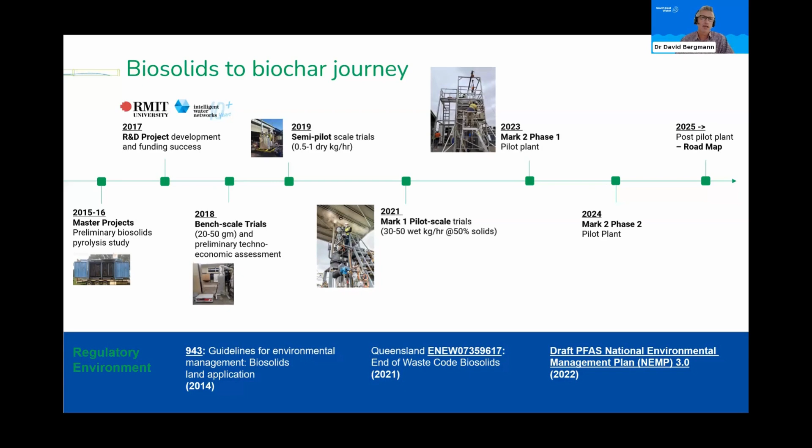I'm going to pass over now to Professor Kalpit Shah, who's going to explain more about how the pyrolysis technology works, the particular benefits of the technology, and why we're pursuing this direction. Thank you so much, Kalpit. Thank you, David, and thanks, Aravind, for the nice introduction.

Now, I'll take you through how PYROCO works. So first, what is PYROCO? PYROCO is a fluidized bed heat exchanger device. What we have done is convert a conventional fluidized bed system into a fluidized bed heat exchanger type device, which offers significant benefits. I'll talk about the benefits later, but let's see how PYROCO works.

In PYROCO, pyrolysis occurs in a pyrolysis zone, which is the innermost zone of the PYROCO system, as shown here. So imagine you have a reactor with a distributor plate at the bottom, and a fluidizing gas constantly coming from the bottom, and your solid waste like biosolids you're constantly feeding from the top. Now, with the help of the fluidizing gas, your biosolids will be constantly fluidizing at a given temperature. But this fluidizing gas will be oxygen-free.

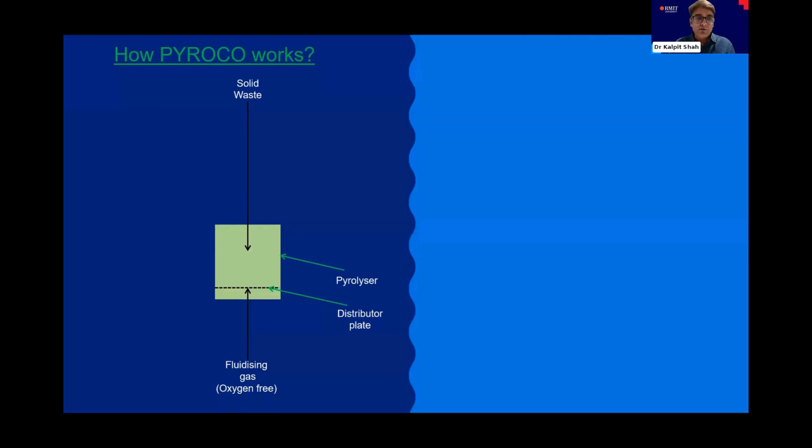That's why you're creating a pyrolysis type environment. Now, when pyrolysis occurs, your biosolids produce mainly oil and gas vapors as well as biochar. Biochar will stay in the bed within the reactor. However, oil and gas vapors will travel upwards, and then we have created at the top a screen type disengagement zone through which we're taking the oil and gas vapors out

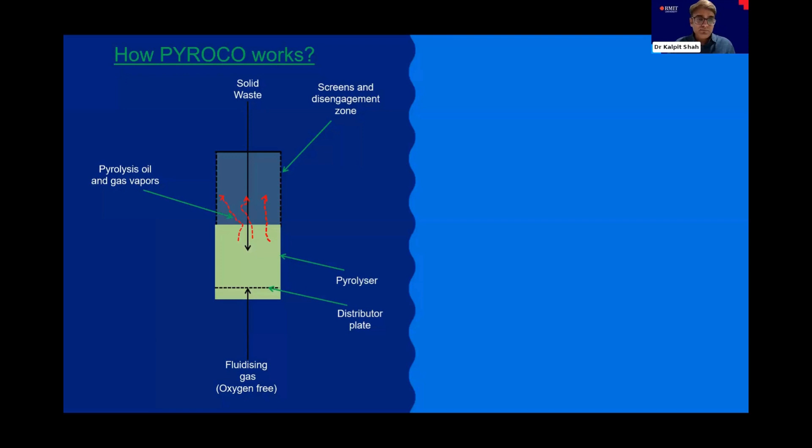into an adjacent combustion chamber, where with the tangential air inlet, we're trying to combust some of the oil and gas vapors in the adjacent combustion zone. Now, when partial oxidation of these oil and gas vapors occurs, they generate energy, and this energy will be provided via indirect mode to the pyrolyzer, because pyrolysis of biosolids is an endothermic reaction.

Now, imagine if you don't have sufficient surface area available just outside the pyrolyzer reactor through just the peripheral surface area, then we're creating additional surface area by putting some of the tubes inside the PYROCO reactor and allowing the combustion gases to travel upward all the way out of the reactor. And this flue gas could then go to the thermal oxidizer followed by the dryer.

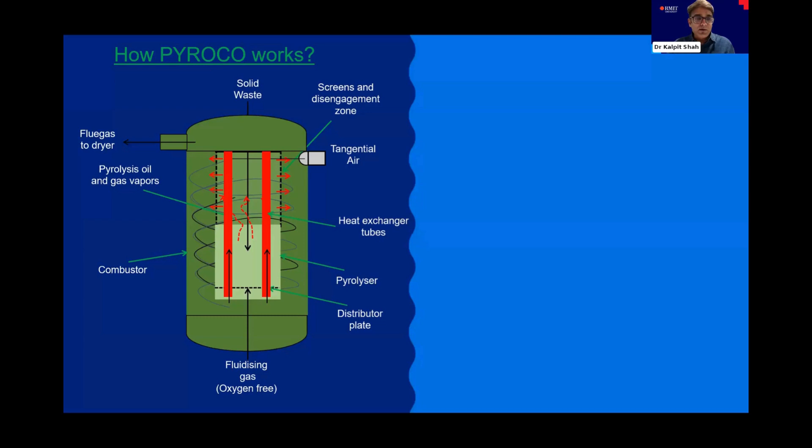Now, biochar will be constantly taken out from the pyrolyzer via an overflow or underflow discharge screw. So imagine you have constant biosolids you're feeding, constant pyrolysis is occurring, and also you have a constant discharge of biochar, and oil and gas vapors which are consistently produced, taken out into a combustor and partially oxidized, and they're traveling through tubes all the way up and out of the reactor. So these combustion gases are providing energy for the pyrolysis reaction.

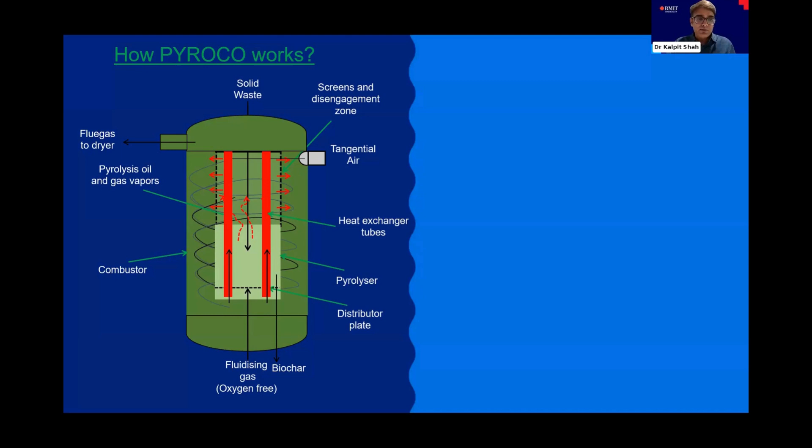Now, let's see what benefit PYROCO offers. The first thing we've done is we have overcome the heat transfer surface area limitations in any other conventional or emerging reactor designs by converting the fluidized bed into a fluidized bed heat exchanger type device. So for any other reactor, the surface area you will have available is just the peripheral surface area of the reactor itself, where pyrolysis would occur.

Now, in PYROCO, along with that peripheral surface area, you could add more surface area by adding a number of tubes within the PYROCO reactor. So that way, if there are highly endothermic pyrolysis reactions occurring, with scale up, you could still meet the heat transfer surface area requirement.

The second thing that we have overcome is the heat and mass transfer limitations associated with other conventional or emerging reactor designs. They have mixing problems, and hence they may have lower heat and mass transfer coefficients. In our design, particularly with the fluidized bed and addition of these tubes, we're significantly improving heat and mass transfer.

Now, what is the benefit of improving heat and mass transfer? With the heat and mass transfer improvement, you can achieve constant or uniform temperature within the pyrolysis zone, and hence you can get a consistent quality product, that is biochar. So imagine if you have contaminants, then you want to make sure that the contaminants are safely removed from all biosolids. And that's where uniform temperature in the bed or in the reactor will surely help.

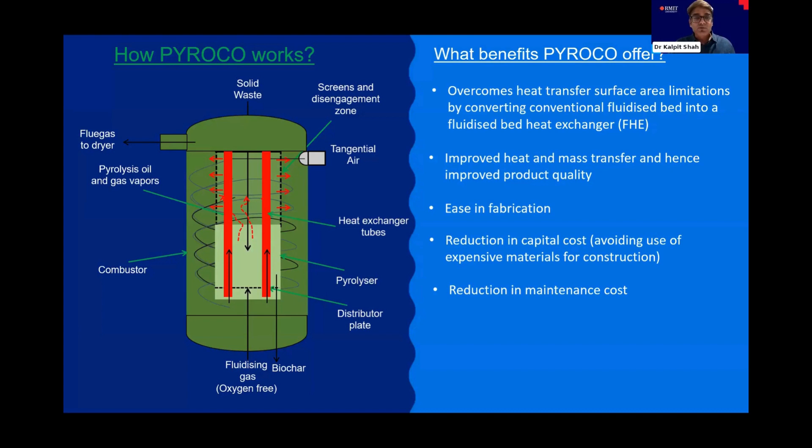In PYROCO, we have avoided any moving parts within the hot zone. That's why we think that it will not only reduce the maintenance cost, but it will also improve the plant availability as well.

And the last thing is, while developing this design, we constantly questioned ourselves: currently available commercial or emerging designs could only offer up to certain kilograms per hour capacity, and after that, they provide modularized units. Now with that, you can't achieve economy of scale benefit. So with PYROCO, we're hoping to cater to various demands from small to medium size all the way up to large scale in a single unit.

And that will surely improve the cost benefits, because if you have one large reactor, you will save a lot on capital as well as other operating costs.

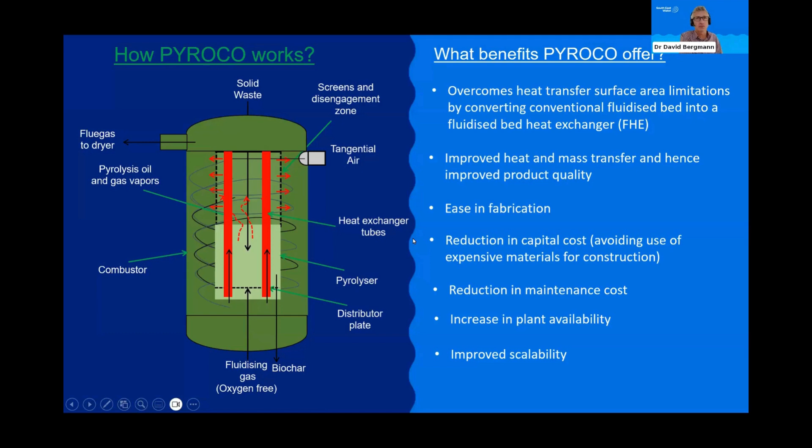So back in November, we ran across a period of about 2 weeks. We were operating at about 20 kilos per hour of biosolids feedstocks. That's equivalent to about 85% solids on a dry basis. So fairly low rates at this point in terms of the scale. But you can still see the scale of the pilot plant is still significant. It's no longer a toy.

So we ran a mix of biosolids. We also ran mixtures of biosolids and straw, and we also ran FOGO, food organic, garden organic material as well. These materials were sourced from a range of metropolitan and regional water utilities. Some were in a granule form, about 1 to 2 millimeters in size. Others were in a pelletized form, about 4 to 20 millimeters in size. Overall, as Aravind mentioned, we ran about 6 forms of biosolids and FOGO through the pilot plant. Considering the time that we had, it was a good range to put the PYROCO reactor to the test.

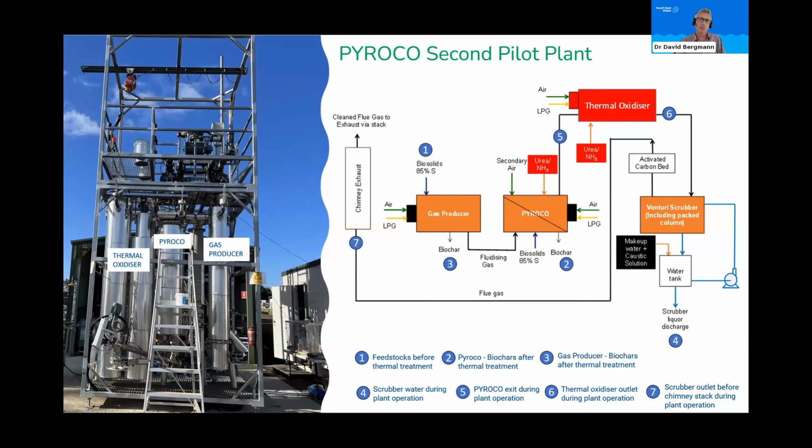Over to you, Eamon. Great, thanks, Dave. So today I'm going to touch on 4 topics. I'll start off with the overarching drivers for South East Water, which are the context for the business case that we've had approved. I'll then go into some detail around the business case and the business case pillars that we developed. I shall then talk about the pathway which we have for this technology leading to future commercialization. And I'll close out with a discussion around the biochar market, on which we commissioned a biochar report recently.

So in terms of the South East Water drivers, all of the utilities in Victoria are committed to net zero by 2035, and that includes quite significant reductions by 2025 and 2030. South East Water has committed to net zero by 2030, and the emissions associated with biosolids, the stockpiling of biosolids, are quite significant.

South East Water also has ambitions within the circular economy in Victoria. And in that context, we need to find beneficial use for our biosolids and our recycled water that we produce. And also we want to see what collaborations we can achieve around circular economy.

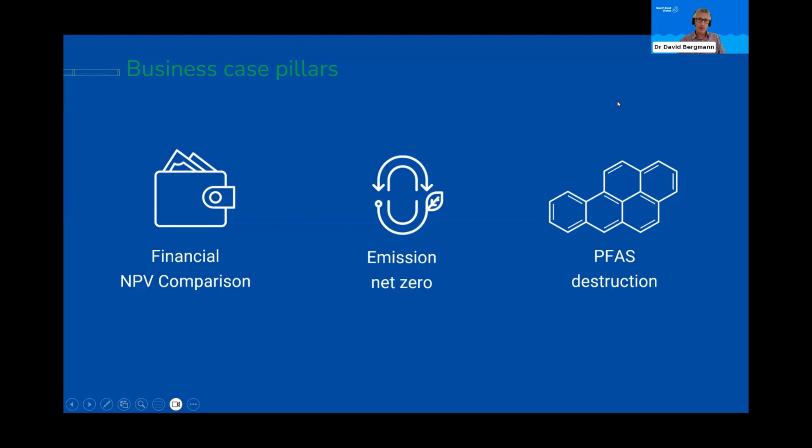So maybe if I go Kalpit first, there's a few questions about the temperature of operation of the pyrolysis reactor, of the gas producer. Maybe can you describe those temperatures and why we're focusing on those temperature ranges? Sure, David. I think I tried to answer that, but I'll just repeat again. The PYROCO reactor itself, the one which I've explained, we're planning to operate between 500 to 600 degrees centigrade. The outer side where we want to do combustion of oil and gas vapors, we're keeping that at around 100 or 150 degrees more, because when you have higher temperature on the outer side or in the tubes, the energy can be then transferred to the inside where the temperature is low. So you always need the temperature gradient.

The gas producer, though, we are operating at slightly higher temperature than PYROCO, because in gas producer we use air, and we try to produce oxygen-free producer gas. And when you have that temperature somewhere between 700 to 800, you get a good quality syngas or a producer gas, and that is also free of oxygen. So gas producer temperature we keep between 700 to 800, PYROCO temperatures between 500 to 600, and adjacent combustor temperature of PYROCO we keep at 700 to 750, and then thermal oxidizer we finally keep above 850, and we provide 2 seconds residence time there, just to make sure that if any PFAS vapors are escaped from this whole PYROCO and gas producer system, they are safely destroyed in the thermal oxidizer.